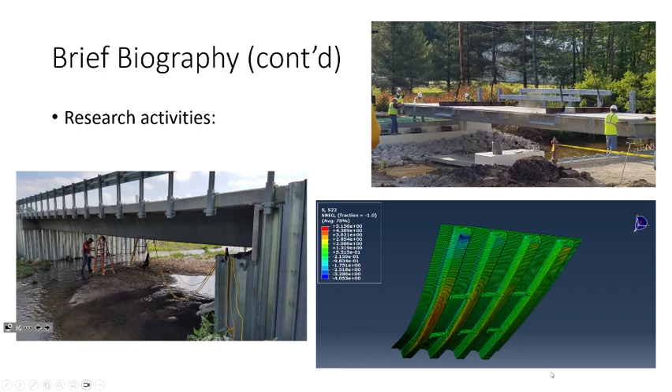But a lot of my work focuses on both the analytical side of things as well as applications in the field. So I try and find any excuse under the sun that I can to go out in the field and do field demonstrations and field testing. So it's a lot of fun. But I don't want to go too long about me. I want to actually talk a little bit about the class because that's kind of why we're here. So let's go through the course operation.

If you've had me for class before, you'll know that usually the biggest component of a grade in my classes is the homework. And for the most part, that's still the case in here. I do have an attendance grade, and we'll talk about the logistics of that here in a bit, but I have a small portion of the grade for attendance. Homework is a big component. We do have a project in this class. It has 2 submittals. One's usually around the early October timeframe, and one's in November, right before Thanksgiving.

And I'll tell you, it's this project. I've had a lot of students say it's actually a fair amount of fun. It's not a terrible amount of work, but it's just a way of breaking from all of the raw computations and just having some fun. Basically, what we're going to be doing is sizing a truss bridge that connects this building to the biotech building next to us. So it's a lot of fun. I think you'll enjoy it.

One of the main reasons for that project, though, was to try and give you a reason to open AutoCAD again, because you are going to have to produce some drawings. So we do have 3 exams in the class. 2 of them are going to be during the semester, and one's going to be during finals week. This is the textbook. I don't care if you have a physical copy or a digital copy. Either one's fine with me.

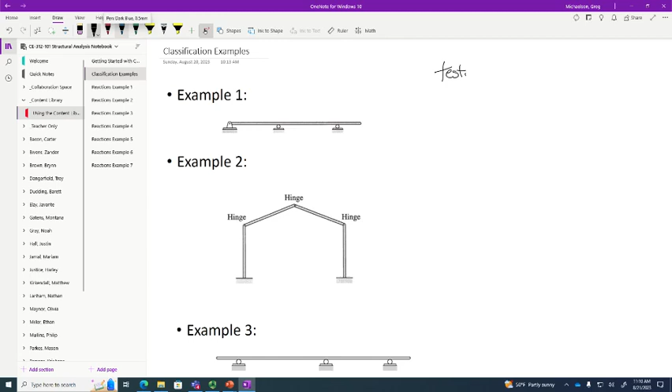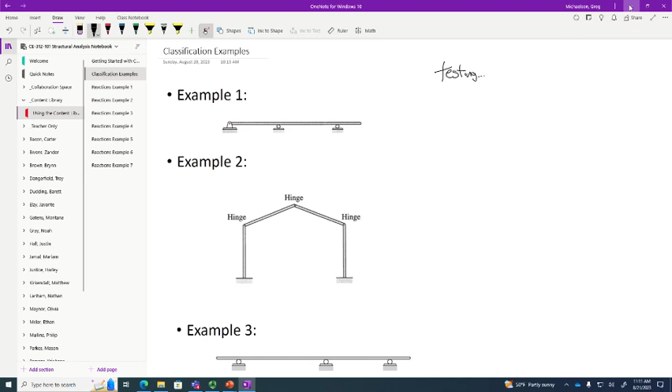So I just wrote testing, right? Once this syncs, you can see it syncing right now. Once that syncs, if you all open up Teams right now and open up OneNote, that testing should show up. So literally every mark that I put on the whiteboard will be accessible to you at all times. And I've found that most students tend to really like that, because you can even install OneNote on your phone and pull up the notes in class. It's still syncing, so we'll give it a little bit. Okay. All right. So Microsoft Teams, OneNote.

Other than that, the only other software packages that we're going to use in here, we do have Chrome, Firefox, Office, stuff like that. There is one software program that we are going to use a little bit later in the semester called Mastan. It is the program that we're going to use to perform structural analysis via computer. One of the reasons I use that package is that it is both Windows and Mac friendly. But we won't be using that until later in the semester, like in the late October timeframe.

But I just mention that to you because there are going to be a couple days where we're going to have some software demos, and so a little bit later in the semester you'll want to bring your laptops to class. Now with that, I do want to discuss attendance. So like I said, I do take attendance in this class.

If you've had me for class before, you know the drill. If not, the way that I take attendance is I usually start class every day with an announcement slide, and on the announcement slide, I have a QR code. If you scan that QR code, it'll take you to a Google form. You just put your first and last name in, and there you go.

I started doing that actually as a result of the pandemic. My initial reason was I was teaching statics, and I had 60, 70 people in there. It's real easy to take attendance when you have 60, 70 people if you just say, scan the code. So it worked out pretty well, and I still do that to this day. Find it pretty easy.

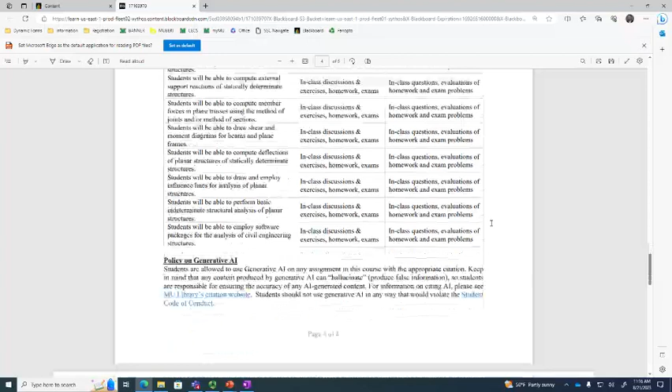Okay, I do want to say one thing about generative AI. I think probably you're going to be hearing that a lot from some of your instructors if you haven't already. We live in the age of ChatGPT, right? And the university doesn't really have a be-all, end-all policy on ChatGPT. Instead, what they're doing is they're offering suggestions for what instructors should do regarding ChatGPT, and so there's different layers to that. So some instructors might say can't use it at all. Some instructors might say sure, go ahead, and some instructors might say sure with some restrictions.

In this course, I'll level with you. I'm really not worried about it for a couple of reasons. One of them being that software package I mentioned earlier. Once I show you that, you're going to kind of see how you can use that to do problems anyways. But the other main reason why I'm not too terribly concerned about it is this class has sort of been described as statics 2. And I don't know that ChatGPT is really all that good at doing statics problems. If I was teaching a course on medieval Russian literature, that'd be a little different, because you can have it write essays for you.

I mean, it can do some computations, but I was messing around with ChatGPT and I asked it, what is the standard deviation of this set of numbers? And it got it wrong. So it wasn't right, because I did it myself. I was like, that's not right. It was close, but it wasn't correct. So I'm not really that concerned about it. So that's pretty much it.

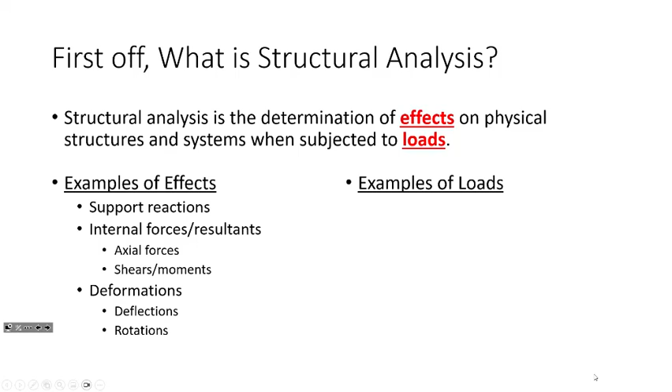Now, I say here structural analysis is the determination of effects when subjected to loads. What do I mean by loads? Well, loads really can be broken up into two categories. One of those categories is gravity loads, stuff that acts in the direction of gravity. So dead loads being the self-weight of the structure itself. Live loads being transient, stuff that can move. Basically occupancy loads, what the structure is being used for.

And we're going to talk about this stuff in more detail throughout the semester. But then we also have environmental loads. So things like wind. Another gravity effect might be rain or snow or ice. We don't have to really worry about this on this side of the country, but if we were out in California, we'd have to worry about earthquakes. Okay, so those are loads that are applied to structures, and then structures respond, and understanding those responses is important.

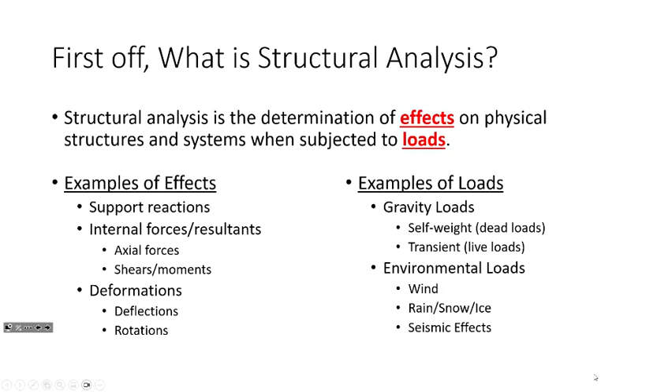Now, why are they important? Why do we care about structural analysis? Why do we need that? Well, we need to be able to analyze structures in order to design them. That's pretty much it in a nutshell. I'm going to use the bridge engineer terminology, but if you have a bridge out in Barboursville and you know it's going to be 50 feet long, you know the traffic load it's going to carry, you know the general geometry of it, you need to understand those loads and those effects and those responses in order to be able to size those elements.

How deep do the beams need to be? How many of them do we need? How far apart are they braced? How many shear studs do we need? So on and so forth. Those questions need to be answered because that's what you need in order to be able to build the bridge. Okay? And so that's why we're in this class. That's why you take structural analysis, because you use the tools in structural analysis in order to design.

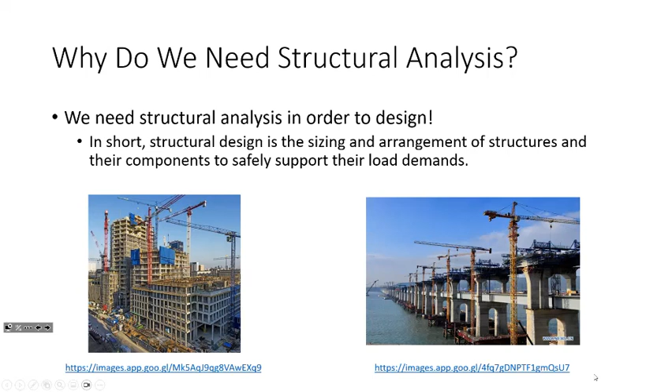Okay? And what is structural design? Structural design is sizing and arranging the components of the structure to make sure it can safely support the loads it's going to be subjected to. So we're talking about beams, columns, connections, all the components necessary to keep the structure upright. Whether we're talking about buildings or bridges, it's all the same concept.

Where do we start? Okay. Well, we need to adopt some basic tools. And in the land of structural analysis, we really have three conceptual frameworks that we start off of. And the first is statics, static equilibrium. So whenever we analyze a static structure, we have to ensure that the forces it develops, the reactions it sees, adhere to the principles of statics. And that is that the sum of forces equals zero and the sum of moments equals zero across the structure. And again, those of you who had statics, you know what I'm talking about.

Okay. I'll level with you right off the bat, and I usually get a big sigh of relief. You will not see the letters I, J, K in this class. We don't do that in here. And there are reasons for that. It's not because I think dot products and cross products are icky. It's because a lot of what we do as civil engineers is we break down structures into two-dimensional representations. And in the land of 2D, you really don't need vector notation. And there are easier ways of doing the analysis. In some contexts, vector computations can actually hinder your progress.

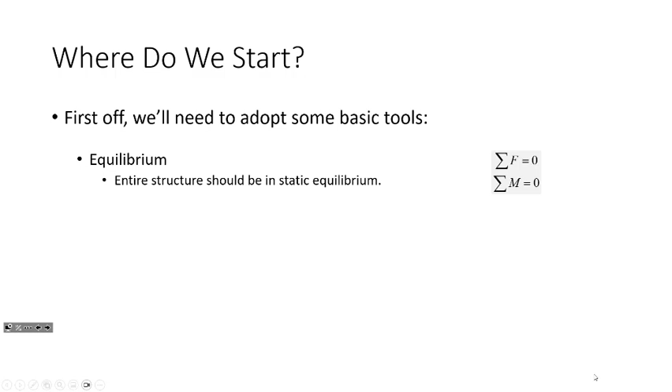And so the way I like to describe what we do in here is we take what we learned in statics and we learn easier ways of doing it, but we take those easier processes and apply them to more challenging structures. That's kind of what we're doing in here. So there's three conceptual frameworks. Again, first is statics. The second is what I would call constitutive relationships. So those are the relationships between stress and strain.

How many of you are in CE 321 this semester? I'm just curious. The materials class. Okay, so if you're in materials, you're going to be doing material testing. You're going to be taking aggregates, concrete, steel, alloys, and applying material tests to them to understand things like the Young's modulus or the elastic modulus of these materials, and so on and so forth. Where this comes from is being able to characterize a material's response to given loads.

And where does that matter for our land? Well, if we're talking about a bridge, things like this can help guide us towards decisions of, are we going to build a concrete bridge? Are we going to build a steel bridge? Are we going to build a timber bridge? Well, it depends on a lot of things beyond just the structural analysis. It depends on the economy and material availability and everything else you're learning in the curriculum.

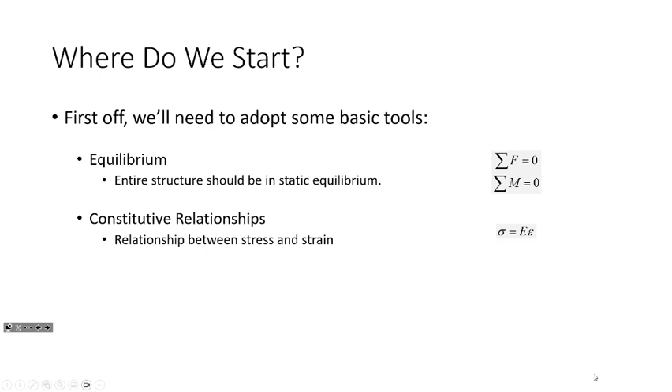This is obviously kind of important to us here. And then the third tool is compatibility, that the displacement should be continuous. These two we're going to spend a little bit more time delving on later, but basically what we're trying to do is tie a thread analytically between the forces that we put on a structure and how much it deforms at the end of the day. And if you can characterize that relationship well, you can do a lot of really cool things in the land of structural analysis.

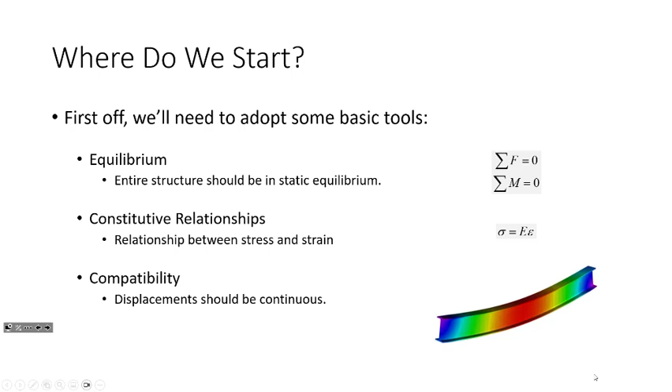Now, one of the things that we do in this course is we use these tools to develop what are called mathematical models of structures. And I'm going to say something that's a little antithetical to everything I've been talking about for the past 30 minutes, and that is that we don't really analyze structures in here. Instead, what we do is we analyze mathematical models that represent structures. Now, we construct our buildings and bridges to try and adhere to those as much as possible, but it is sort of an important distinction to mention.

And one of the actual challenges in structural engineering is, given a system, what analytical model should we use? And we'll talk about that stuff. Actually, we'll start talking about it on Wednesday, as what types of boundary conditions we're going to see and so on and so forth. But the idea is to represent the behavior as close as possible.

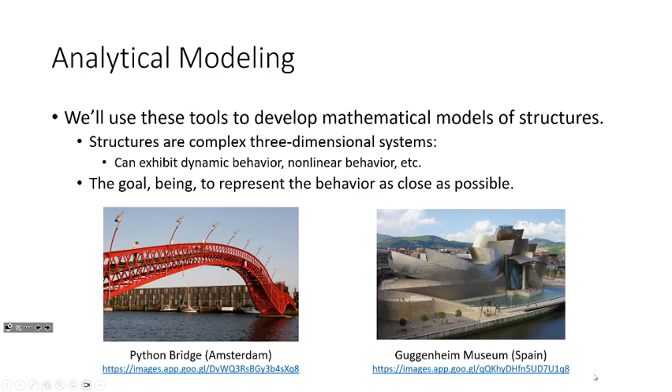I mean, sometimes we deal with some really complicated structures. We've got this weird bridge in Amsterdam. We've got a Guggenheim Museum in Spain. These are not easy to deal with. But ultimately, what we as engineers try and do is we try and keep it as simple as possible. So what we'll try and do is take these complex structures and resolve them into something that we can handle, right? I mean, even something as basic as a roof truss.

I mean, even this is a three-dimensional system. This is sort of what I meant a little bit ago about vector notation. So here we have a complex three-dimensional roof truss system, and I'm resolving it into this, which is something that I can use the wonderful world of Engineering 213, or in this case CE 312, to analyze. Then once I analyze that, I can use those forces to determine how big those roof truss elements need to be, and then I begin the process of structural engineering. We're going to get into the specifics of this throughout the semester.

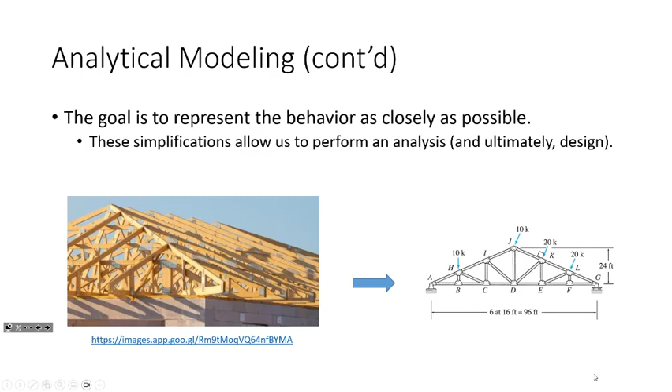I'll say that you do sacrifice a little bit of accuracy when you start doing stuff like this, when you start taking this and resolving it into 2D. But the question is, we just need roof truss sizes at the end of the day. Is this accurate enough? And for the most part, yes. We have tools like finite element analysis and advanced analytical techniques for when these simplifications are not accurate enough. And we can talk about that stuff later. Right now, what we're trying to do is understand the basics of fundamental structural behavior. And that's what we're going to be doing in here. Okay.

Does anybody have any questions? Okay, so a little bit on logistics. So I do not have a homework for you today. Yay. I have a homework for you on Wednesday. That homework will be due Friday when you have lecture on Wednesday.

So what we're going to be talking about on Wednesday is how to take structures and classify them. And so when we classify a structure, we're really trying to ask two questions and answer them. The first question is, is the structure stable? And the second is, is the structure statically determinate? And we'll talk about what that means on Wednesday.

But once you go through that lecture and you see the homework assignment that I give you and you see how it's due Friday, you'll really quickly see, oh wow, these homeworks really aren't going to be that bad from semester to semester. And again, like I said, if you've had me before, you kind of get the deal.

Any other questions? Well, if that's the case, I'm going to let you out 12 minutes early. Unless you want to stay. I see how it is. Everybody's shaking their head. I see how it is.